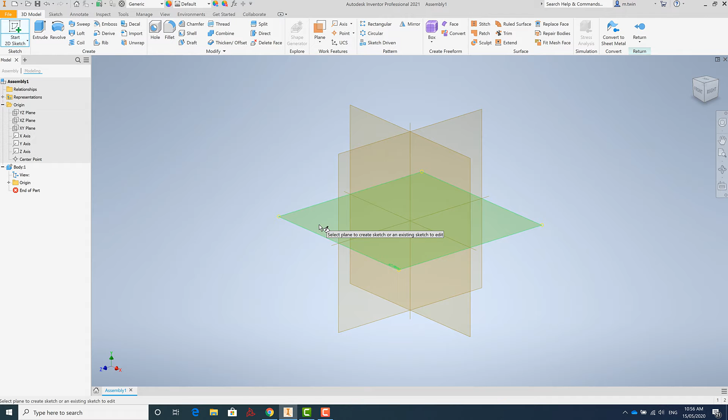So, 2D sketches - here we have our different planes. They're down the bottom there, a little bit hard to see, but they say things like XZ, YZ, and there's a bunch of different ones. We'll click the flat one. So we've now gone from a 3D environment into a 2D environment, and we can do things like create rectangles. I'll get rid of that one.

For our little thumb piano, I think I do want to create it as a piano type shape. So what I'll do is create a rectangle, and we'll make the rectangle point base here, 0, 0.

Now, being an American bit of software, it's asking me for 0 inches and 0 inches. I would much rather work in metric - makes a lot more sense. So we'll come up to here, manage... it's been a little while since I've had to do this. Tools, I believe, and then there's document settings here.

Now you can do this individually. There's also a way of converting the whole thing for the whole program, rather than every document having to work with a separate part. So go from document settings, units, and now we can select our millimeters as our units.

The reason it's got time and mass and everything else here is that you can also use this to work out the mass of items using the various materials in here. Again, it's part of the very powerful features that Inventor has. We'll apply those settings, and then we can close that window.

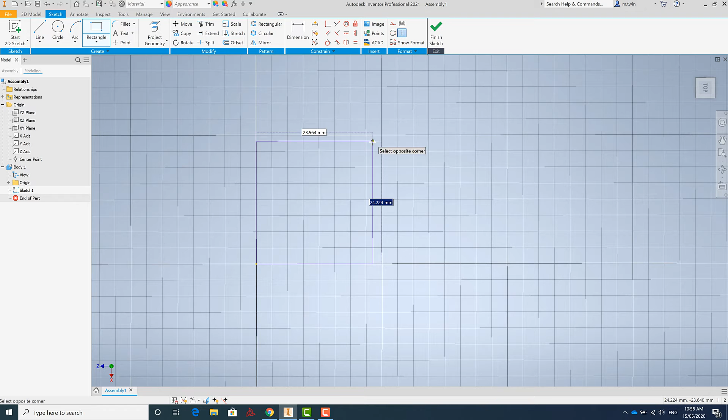Now what we're creating here is a keyring. So initially, I've got some sizes here, and I can just click really anywhere and create something that's roughly the right size, because Inventor is what we call a parametric program. That allows us to change our sizes later, and every size is dependent on every other size.

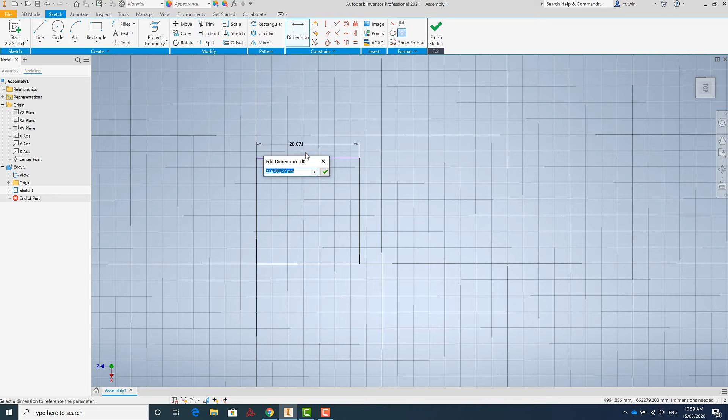So here I've got a 20 millimeter square. I reckon 20 millimeters is probably a little bit small - I don't mind having a big keyring piano for this one. So I'm going to make this one 35 millimeters, and you can see how it's changed here, that second dimension.

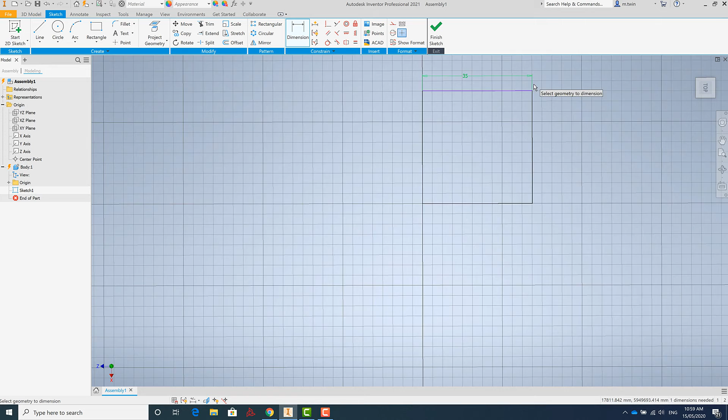Interestingly enough, I'm getting these sort of artifacts on there, which indicates that this isn't 100% flat. So if I start another line, it's just a way to check this. When you specify a line, I can say that I want this line to be, for instance, 20 millimeters long, and if I press tab, that allows me to change the degrees. I want this one to be 90 degrees. I can just double check, then escape, and escape ends that line.

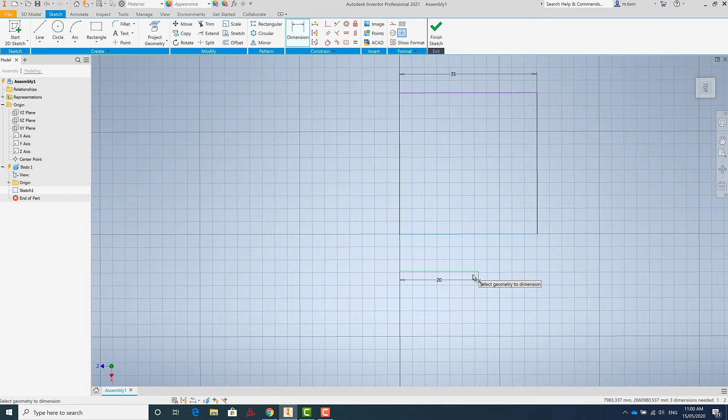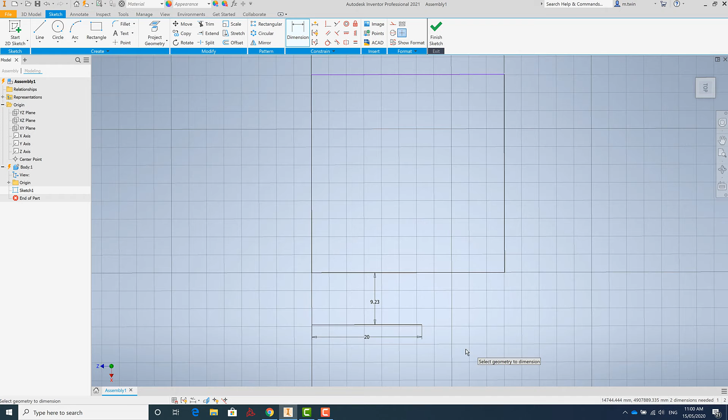So I can check the dimension between this line here and this line here, and if they're not parallel, it'll come up with an angle measurement. Here it's come up with 9.23, and that's a distance measurement, which means they are parallel. I'm just getting some strange artifacts on my screen, and that's everything's okay, but if you come up with that sort of thing, that's a really nice little way to double check. We'll select that and delete it because we don't need it.

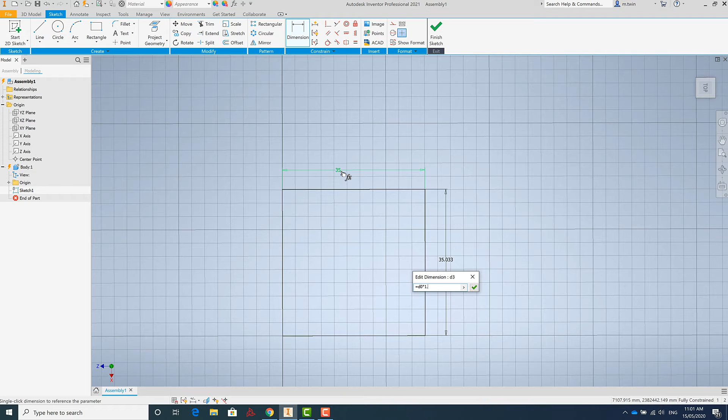Now, if I put a second dimension on here, I've got this one to be 35. But if I want this dimension to be dependent on the other dimension, like doing a formula in Excel, I can put in equals, click this dimension here, and say times 1.5. That means this dimension will always be 1.5 times the length of this dimension. So say I think, oh, actually 35 millimeters is far too big for a keyring - I'm going to make it back to 20 again. You'll see that this dimension here will always be that 1.5 times that dimension.

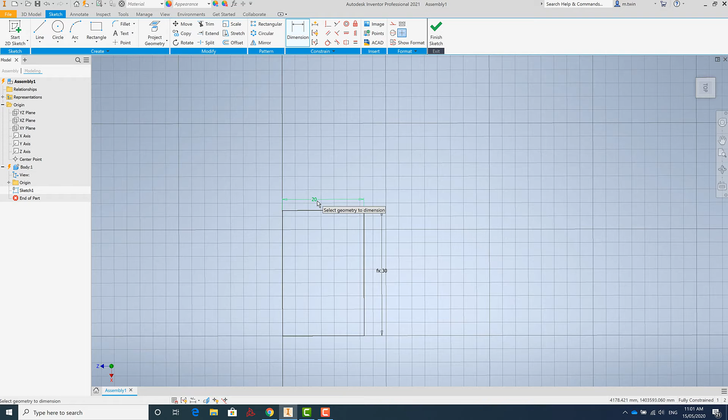Great, so I've now got a square, but a square's got some pretty sharp edges, and it's not very interesting a shape for our little keyring. Remember, this is the body - this is what everything is going to be based around.

So what I can do here is go up to our line tool, go down, and I've got spline. A spline allows me to do some really cool curves. You'll note the little marker here has gone green, meaning it's snapped to some sort of feature - in this case, the corner of those lines.

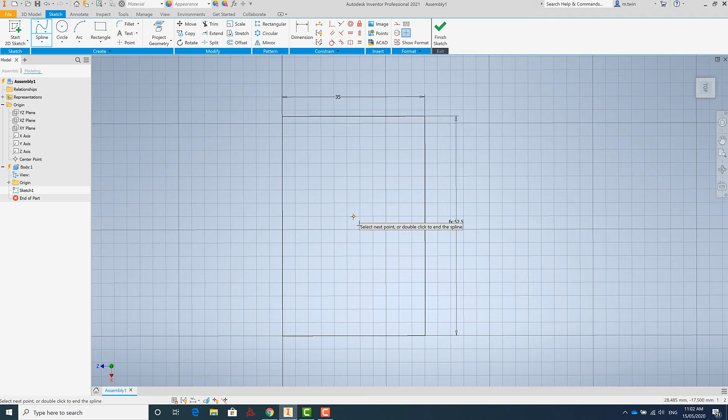Now I think I actually want to make my little thumb piano look like just a small piano. So I'll come to about halfway down there, and then bring my spline down, and you can see what's happening is it's creating a line interpolated between those points. I think we'll go something like that - so we're creating a vaguely grand piano shaped keyring.

Now you can go back later and edit these. So I think I do want to bring that one in a little bit, a bit more curvature in there.

Now it won't let me move this one, because when I put this one on the line, it was directly on the midpoint of that line, and so there's a resistance there to stop that. If you don't want a spline to be locked in like that, you can just click somewhere else.

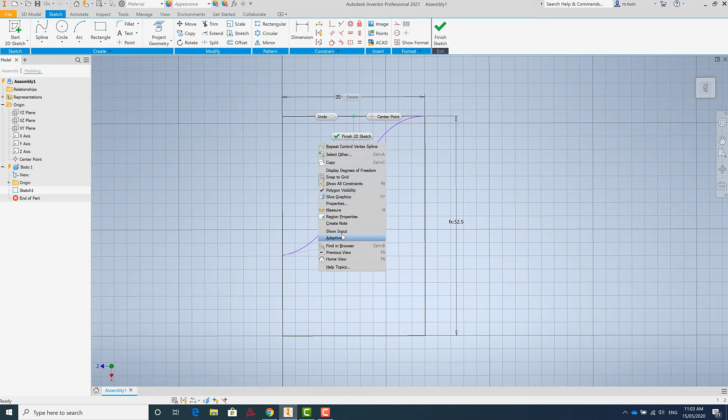So what I'll do now is trim this line. You can see here that when I wave my cursor over here, I've got a dotted line and a solid line. Now if I put my cursor down here, the dotted line is on this part, and that's the bit that's going to disappear. So I'm going to trim that section of the curve.

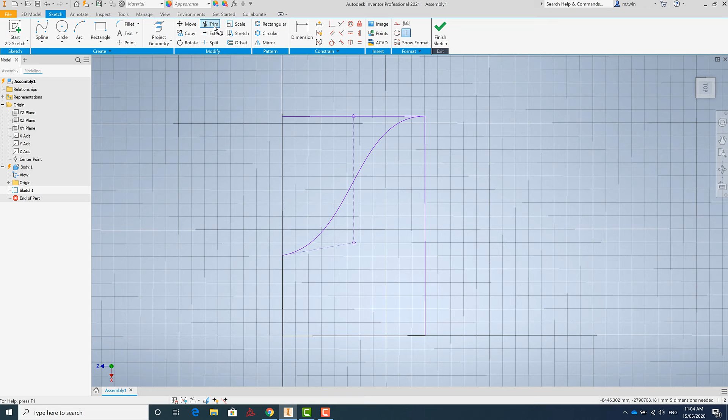What's going on there? What I might have to do - these dimensions can sometimes stop other things happening, so sometimes it's worth just deleting them. And, oh no, it did trim - tell a lie, it did trim. It was just that it trimmed and left behind the guideline, which confused me a bit there.

So then we'll delete that line there. And now we've got a shape that's made up of these lines. And I want to maintain those dimensions.

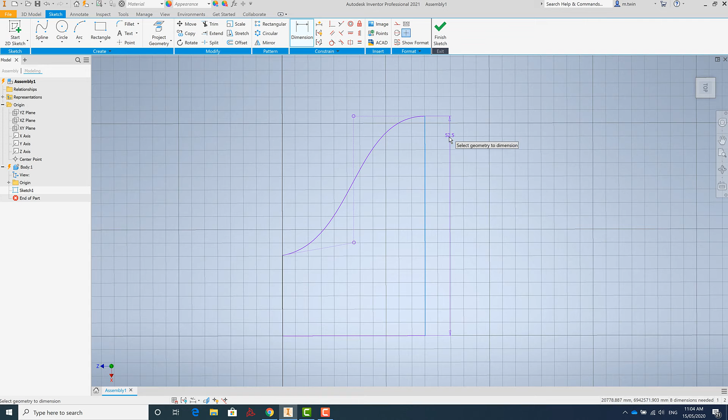So here I'll add the dimension back to this one. Happy with that. And we'll add this dimension back here. Now this dimension, because I deleted it and reinstated it, is now set at 52.5 millimeters in length - it's no longer the 1.5 that it was. I can quite easily recreate that formula in there if I want to.

Excellent. Now, just before I do the next stage and create this as a feature, I think I do want to put a bit of a curve on here. So I can go into here and use fillet, and now the radius of my fillet is this measurement here - here we go, radius 2 millimeters. So what I might do is create that as something a little bit bigger - I think I might like 5 millimeters as my radius.

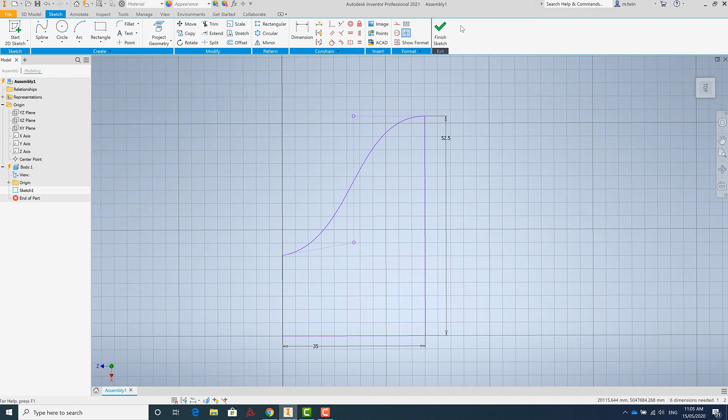And then I'll click on the first line and the second line. Is it going to let me do the second line? It may not - that's okay. Because that second line is a spline, it's got some more complicated computing to work it out, and sometimes it won't let you do things like fillets onto there. But that's not a problem because we can do that at a later stage. It's a great thing about Inventor - there's actually several ways of doing everything.

So I finished my sketch and we're back into a 3D environment. What I can do is I've now got a bunch of 3D modeling options for my sketch. I'm going to extrude it.

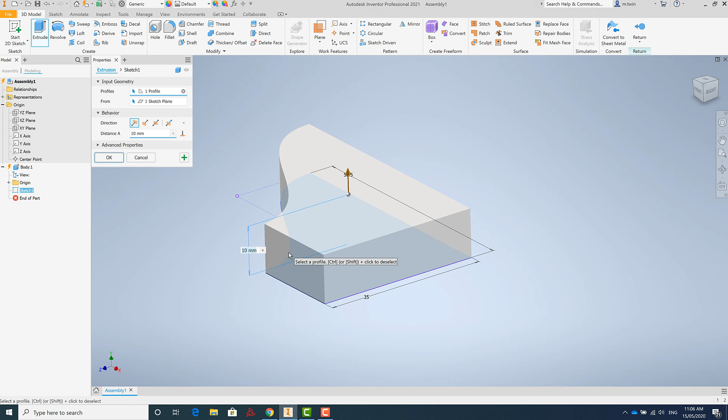Now, for my little keyring piano, I think 10 millimeters is probably about the right height. And it looks, again, vaguely piano-ish, so I'm okay with that. I've got my profile selected, and it's extruding from the sketch plane. I've got the direction, so I can extrude it up or down or both directions, or I can do an unequal extrude, where I extrude 10 millimeters in one direction and 5 in the other. We'll go with the first one.

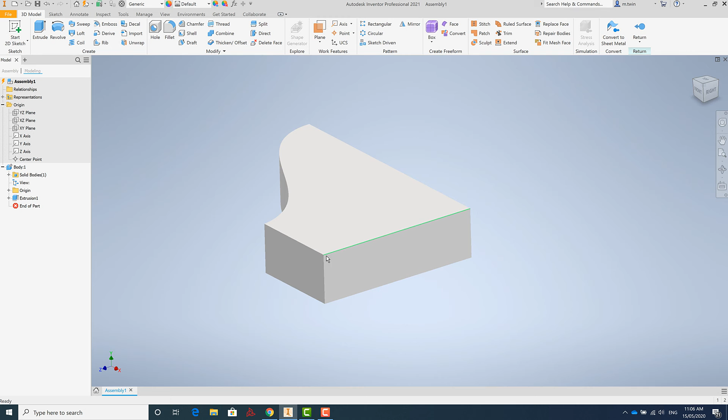Great, so now we've got our little keyring piano. But if this is going to be in your pocket, you'll note that you've got some sharp edges here, and probably these ones too, that we want to smooth off a bit so we don't get attacked by our keyring. So what we can do is now do that same fillet function, but we can do that as a 3D tool.

So we've got a radius of 2 millimeters. Again, I'll make that 5. And now we've got to select the lines that we want. So instead of selecting one line and then the other line like we did in 2 dimensions, in 3 dimensions we just select the edge that we want to fillet. So that's that one there. And you can see we've created a nice little edge.

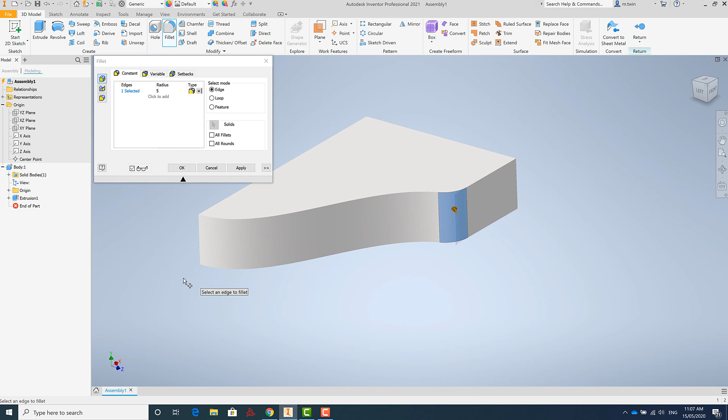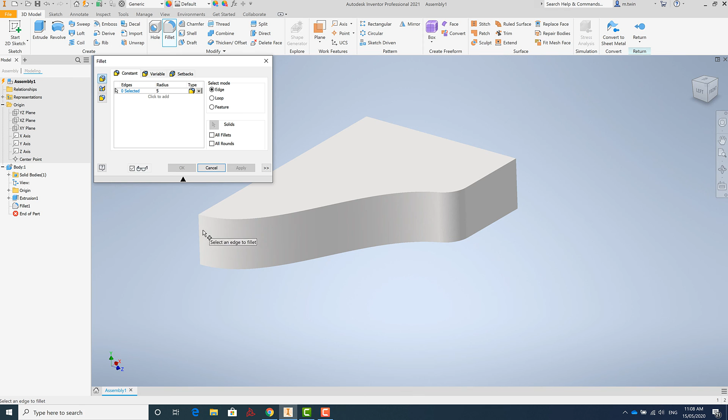And I'll also fillet this edge here. I think that edge is a little bit too big, so I'll cancel that. And we'll come back here and create a 5 millimeter edge here. We'll apply that, that's fine. I like that curve. This one took a bit too much off that corner and I lost that shape, so I can change that radius back to 2 millimeters. And there we go, that's a better shape. And I can apply that one.

Now for these corners here, I can do the same thing. Let's click that one there and that one, and we'll apply that.

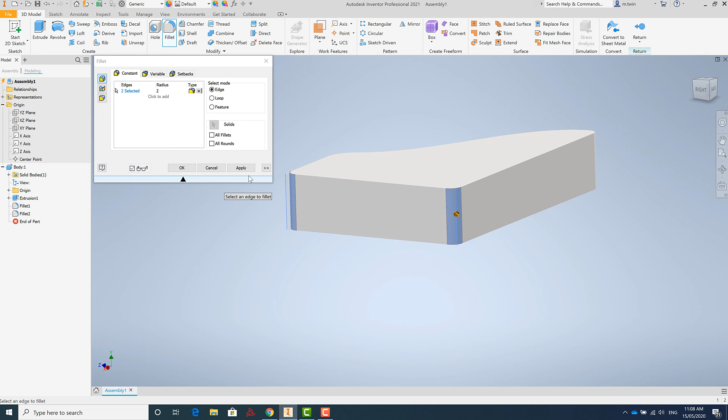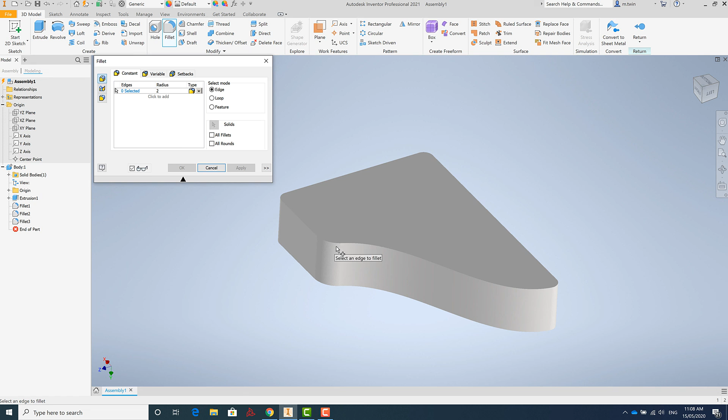Now that still leaves us with this edge here and this edge here. We'll probably address those later because I do want to do some more on those faces, but the great thing about Inventor is that you can do something and turn it off and then come back to it. So what we'll do is 2 millimeter radius, that's okay. So you can see I'm selecting that entire edge. And we'll apply that one and then cancel to exit out of that.

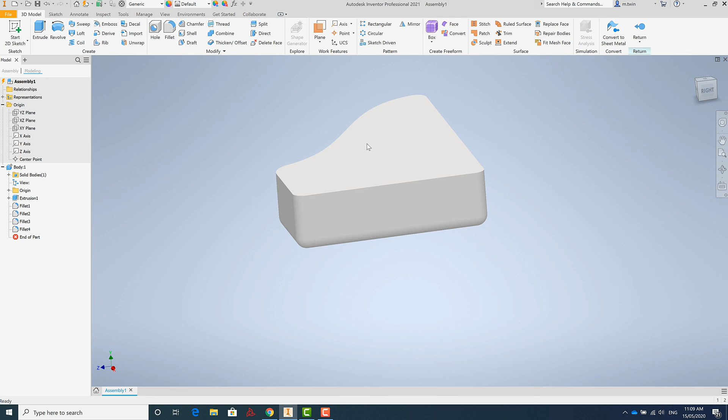So we've now got something that's got some nice smooth corners and will hopefully not dig into your skin too much. Excellent. Now what I want to do here is hollow this shape out to create that hollow piano effect, because we can 3D print this, and a 3D printed shape, especially if it's printed in something like ABS or high impact polystyrene, actually resonates quite well.

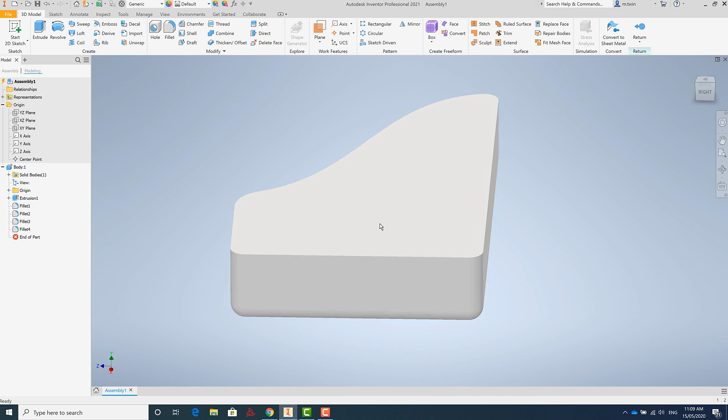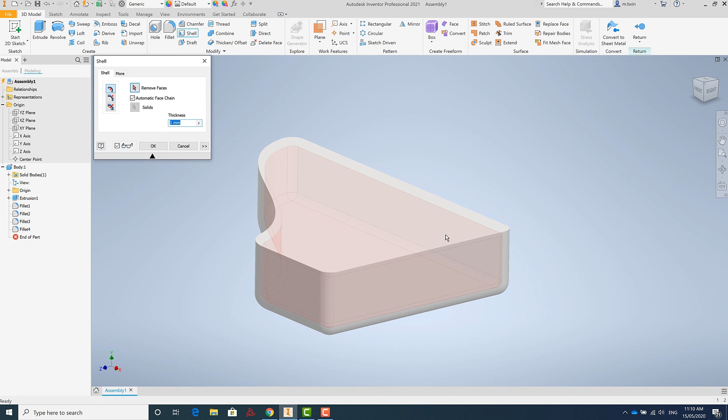So to hollow that out, all I need to do is go up to this tool called Shell, click that one, and we can remove the faces that we want to remove, and set the thickness. So the face I want to remove is this top face. There we go, select that one. That was already selected, so I'm removing that face, and now I've got a nice hollow shape here that's going to be 1 millimeter. Now to get some really good resonance, I might actually hollow that out to 0.5 millimeters, make it really thin, which will make it a bit weak, but hopefully those rounded corners will give it the strength that it needs.

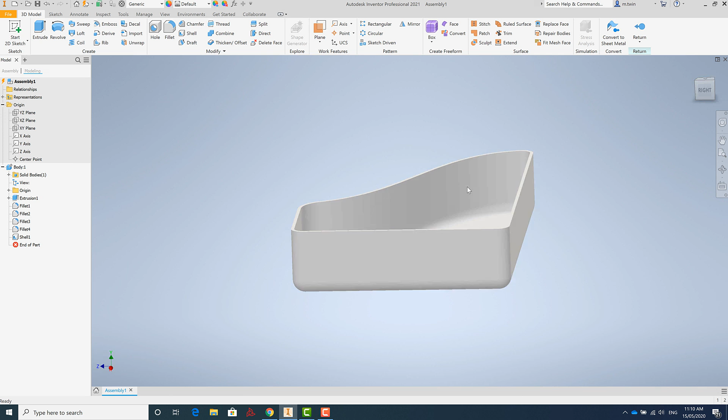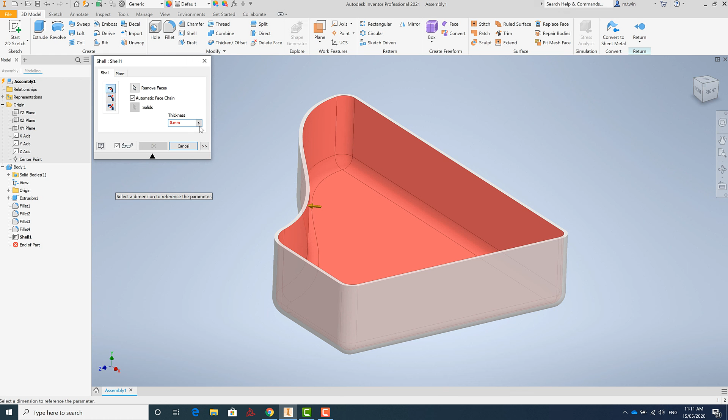Now if I decide that, actually, 0.5, I'm just not comfortable, I think that's going to cause problems. This is where I've got my little menus on the side here, and you can go back and edit anything. So if I right click on Shell, I've got the options to repeat, or I can edit the feature. So by editing the feature, I can say, let's split the difference, and let's say we actually want that to be 0.75 millimeters, just a little bit thicker to give me the confidence of, maybe if it gets hit by my keys or something. There we go.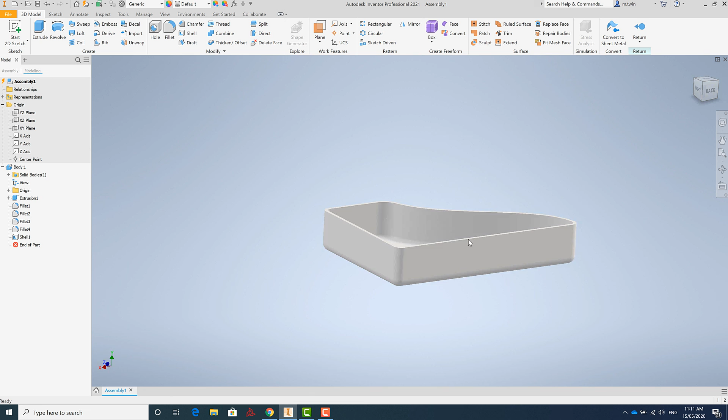Great, so we've now got the hollow body of our little thumb piano. Got nowhere for the keys to go or anything yet, so we can do that with another operation. What I might do is end this as the first part of the tutorial, and we'll address the rest of it in the next part.